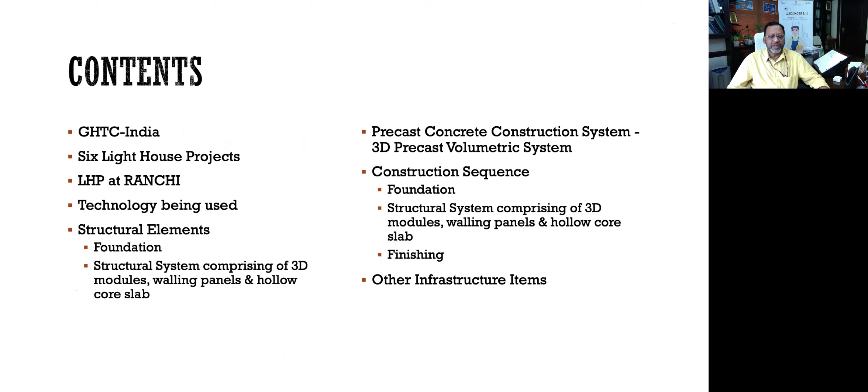Hello and welcome to the lecture on Lighthouse Project at Ranchi. My name is Shailesh Agrawal, Executive Director of BMTPC, and I'm going to educate you all through this presentation about the field level implementation of innovative construction system being used in Lighthouse Project, including design basis, material, manufacturing, few structural drawings. The outline of my presentation is as follows, starting from Global Housing Technology Challenge India and Lighthouse Project. The technology being used in the project will be discussed.

Ministry of Housing and Urban Affairs, Government of India organized Global Housing Technology Challenge India, in which one of the components was Construction Technology India Exposition, which was inaugurated by Honorable Prime Minister of India on 2nd of March 2019. Through this CTI 2019, Ministry of Housing and Urban Affairs could evaluate, assess and shortlist 54 proven demonstrable technologies which can help build maximum number of houses in minimum time and minimum cost.

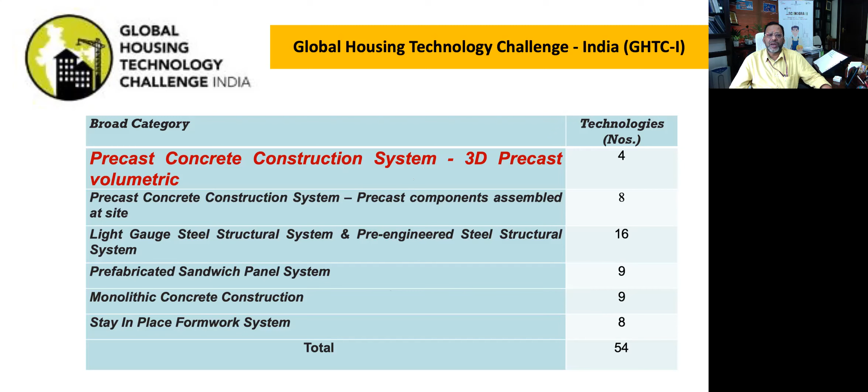These 54 new construction systems have been divided into these 6 broad categories, namely precast concrete construction system 3D volumetric, precast concrete construction system 2D planar, light gauge and steel structure system, prefabricated sandwich panel system, monolithic concrete construction, and stay-in-place formwork system. Today, we are going to discuss precast concrete construction system 3D volumetric, which is the construction system being used at Ranchi.

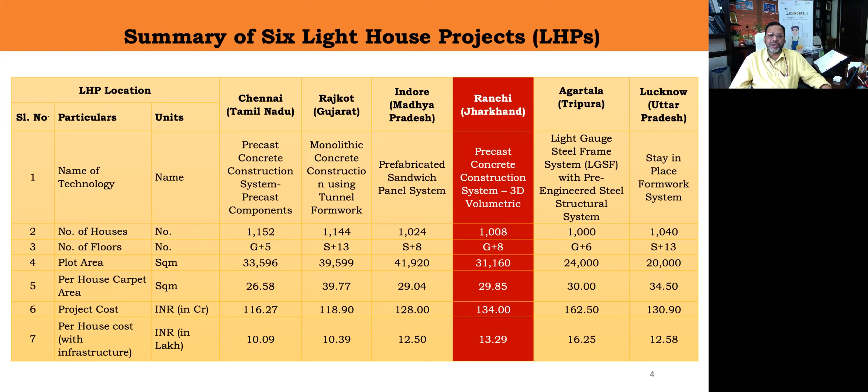Before getting into the technology, let me briefly tell you about the 6 lighthouse projects which are currently being implemented in different parts of the country. They are in Chennai, Rajkot, Indore, Ranchi, Agartala, and Lucknow. As you can see, the houses being constructed are more than 1,000 in all the places, and number of floors vary from 6 to 14. At Ranchi, the structure is 9-story.

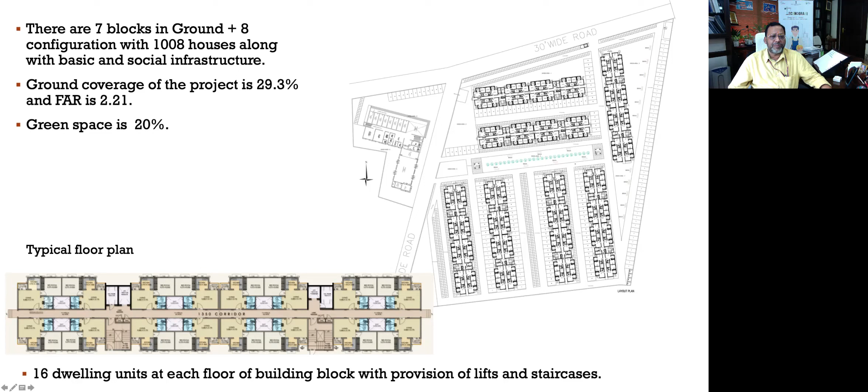Just have a look at the layout of the project at Ranchi. There are 7 blocks, as you can see in this drawing: 1, 2, 3, 4, 5, 6, 7, and all these blocks are in the configuration of ground story plus 8-story. So it's 9-story. There are green spaces up to 20%. And as you can see in this typical floor plan, there are 16 dwelling units in each floor, which are connected through a corridor of 1.3 meter wide.

Along with the NBC norms, the other features which have been included in the project are as follows: green rating as per GRIHA, use of renewable resources in terms of rainwater harvesting and solar lighting, solid waste management, sewage treatment plant with recycling of water, and firefighting system have also been included as per NBC 2016.

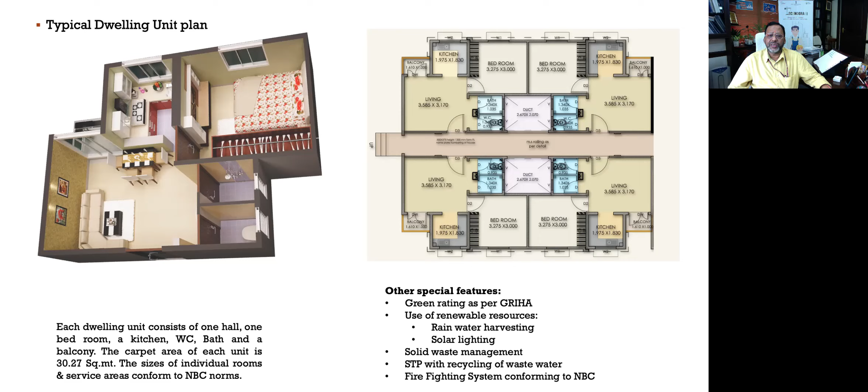The other system, which is much popular of late, is cast in situ RCC framed structure, where on a foundation an RCC frame comprising of cast in situ columns and cast in situ beams is cast, and then slab is cast in situ and infill is done with any masonry. So these two methods, as you all know, are time consuming.

They are not resource efficient, and over time, it has been found they are not even sustainable and not environment friendly. It is high time that we replace these systems by systems which can help build faster without sacrificing structural and functional performance. One such system which was evaluated, assessed, and shortlisted during Global Housing Technology Challenge India is precast concrete construction 3D volumetric.

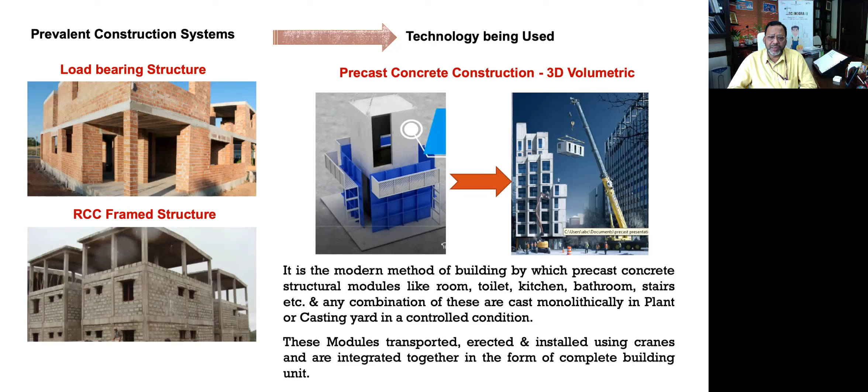Let me just explain the manufacturing, transportation, and installation. What typically is being done? First of all, you have the mold. Depending upon the project and depending upon the size of your dwelling units and the size of your rooms, it is first decided what kind of modules need to be made or cast, and depending upon that, you first design the modules.

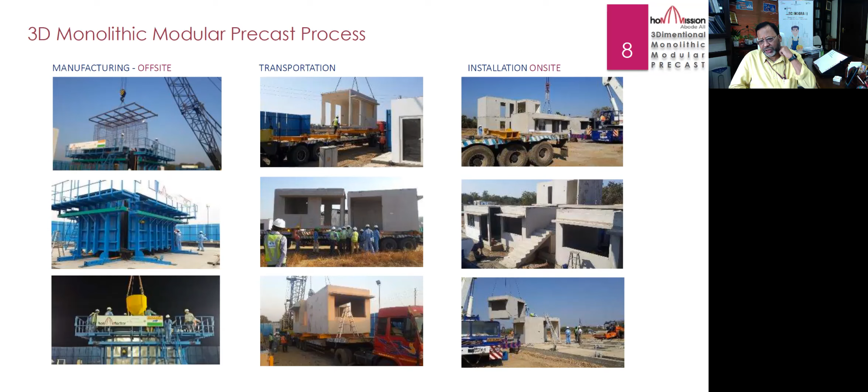Structural elements, if I talk about them: because the entire thing is made volumetric in 3D modules, the walling element, the floor, your roof, all are cast together. So the entire box is the structural element here. Basically, this 3D box acts as a structural system which helps in transferring the load of the structure to the foundation.

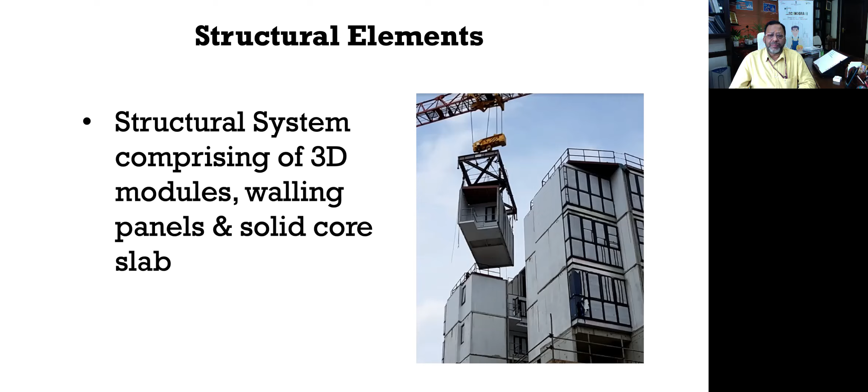As you can see, for manufacturing it, first you require the steel mold, which is again customized depending upon the project requirements. Sometimes these 3D modules are also known as pod elements. Then you have high strength steel, coming from the structural design, which is placed in these 3D molds. If you are doing a kitchen pod or a toilet pod, you need to fix pre-planned electrical and plumbing lines, and once you have fixed all services, you pour the concrete.

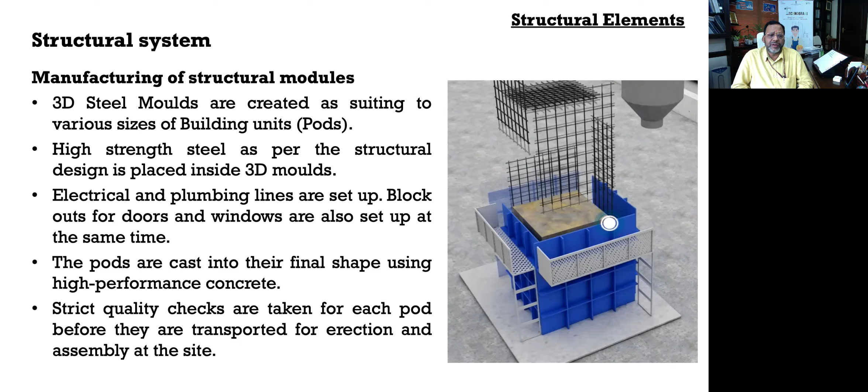There are strict quality checks taken before pouring the concrete, and then they are transported to the site under strict supervision and erected in the same fashion. Construction normally follows this sequence. First of all, you need to make the foundation, which will be as per the soil strata, the geotechnical investigations and bearing capacity.

Once you do the foundation, you bring those structural modules, which you can concurrently manufacture in the factory or in the casting yard. Once you get those structural modules or pod elements at the site, you can put them on the already laid foundation after aligning them and joining them together through dowel bars, already laid anchors and other things.

Okay, gable end walls are positioned to terminate the sides of the building. The ends of the room are known as gable walls. Sometimes you can make it without gable end walls; it depends on the project and your requirement. You can have an open-ended module, and later, to have monolithic action, you can put the entire end wall, which is again made in the casting yard. If these spans are high, then you can use pre-stressed slabs. It can be hollow core slab as well.

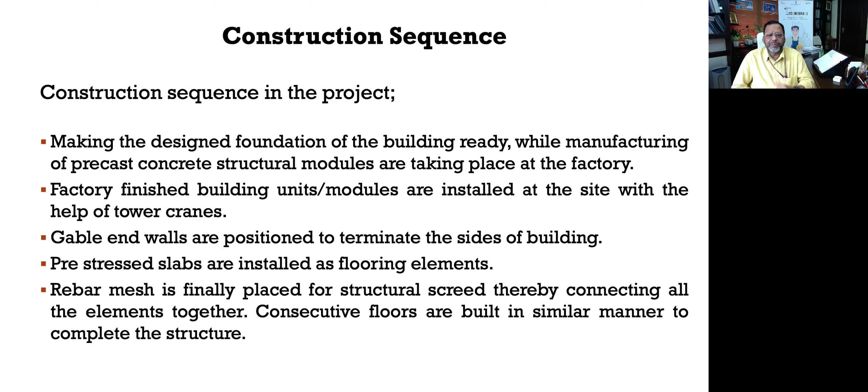Once you put the module over the foundation, in order to have another floor over this, screed is nothing but a concrete of less thickness. It is around 75 to 100 mm thick, with nominal reinforcement, which is a rebar mesh, put over the already laid module so as to connect it with the floors which will come over that structure.

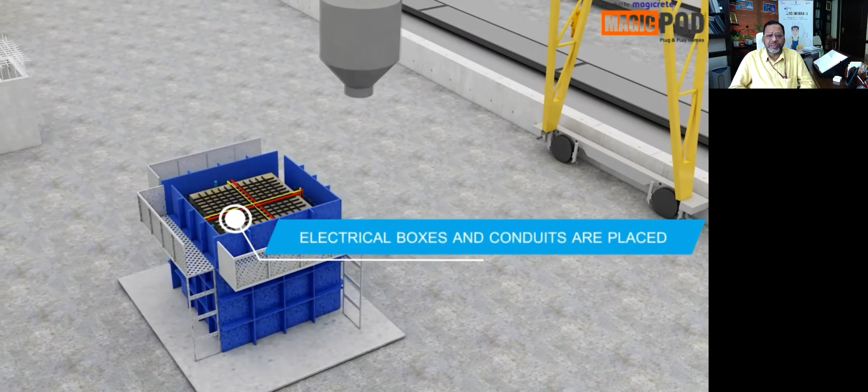Let me just briefly show you the entire sequence through a video. So mesh is being put on the mold, and then you can see electrical boxes and conduits are being put, and now already made concrete is being poured here. This is self-compacting concrete, so you don't require any compaction.

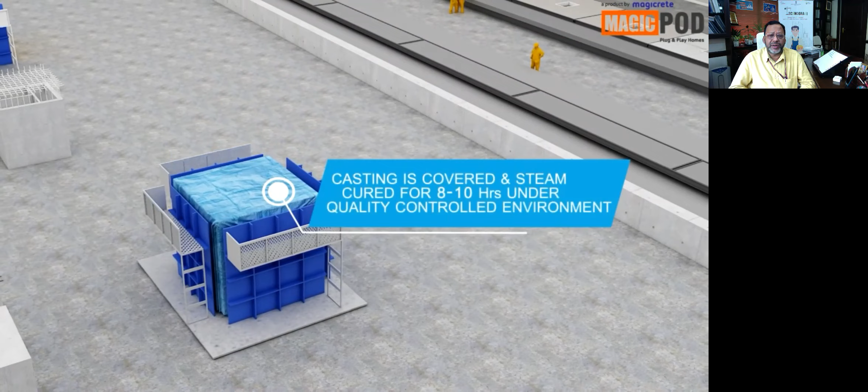And after some time, you demold it. Demold means remove the mould, then casting is covered, and then it is steam cured for 8 to 10 hours. Once it is cured and gained strength, then through a gantry girder and crane, you lift the module. And right now that lifting of module is taking place.

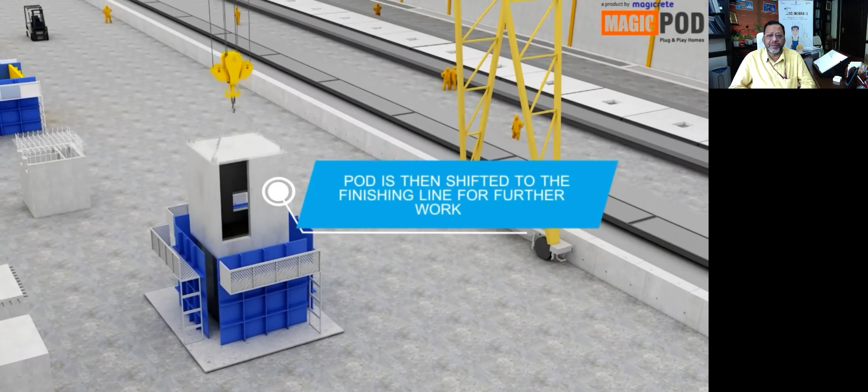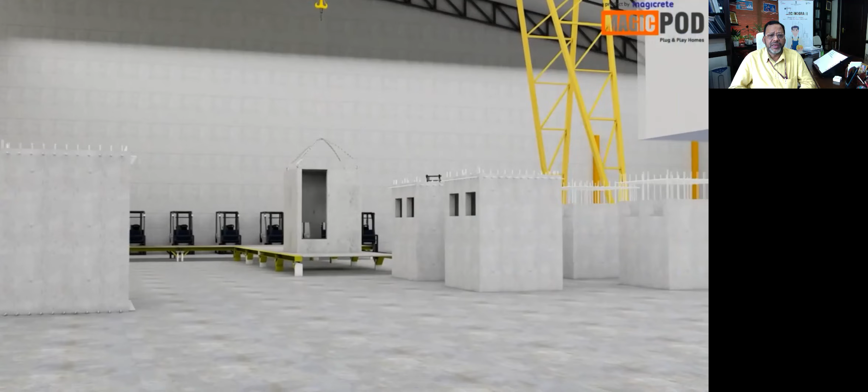So once it is lifted, then it is taken to other part of the casting yard, where, as per your requirement, you can put the finishing items in this. Suppose you are making a bath or a toilet pod, so you can put the seats. If you are doing the plumbing, you can do the plumbing. Here this waterproofing and tile application is shown.

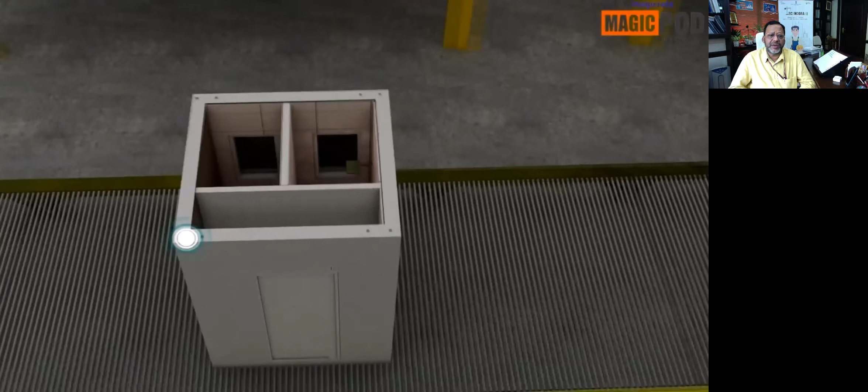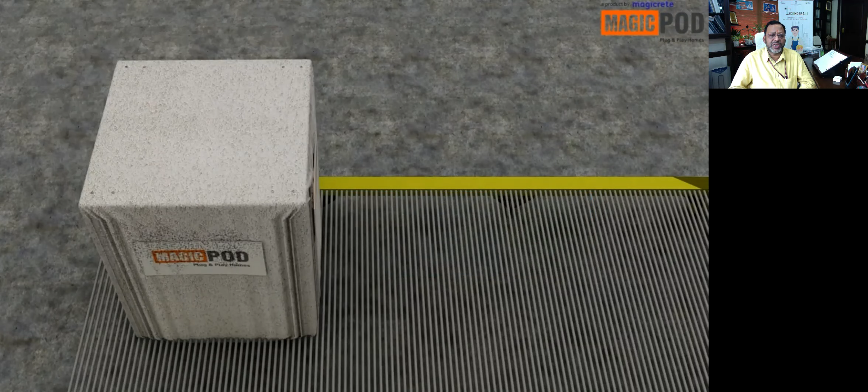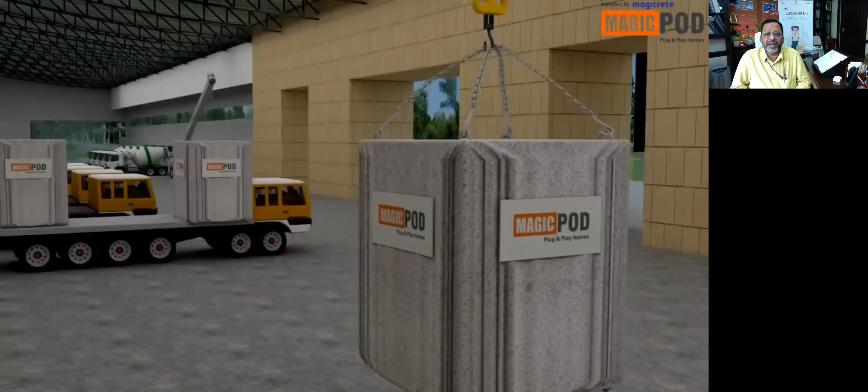Then you can put the ventilators, doors, windows, then the WC wash basin, and now this pod is ready. And after final finishing, this pod can be loaded on the truck and can be transported to the site. So this is how it is being laid, and we need to design these anchor bolts also for lifting it and putting it on the trailer and then transporting it to the site. So these anchor bolts are also designed.

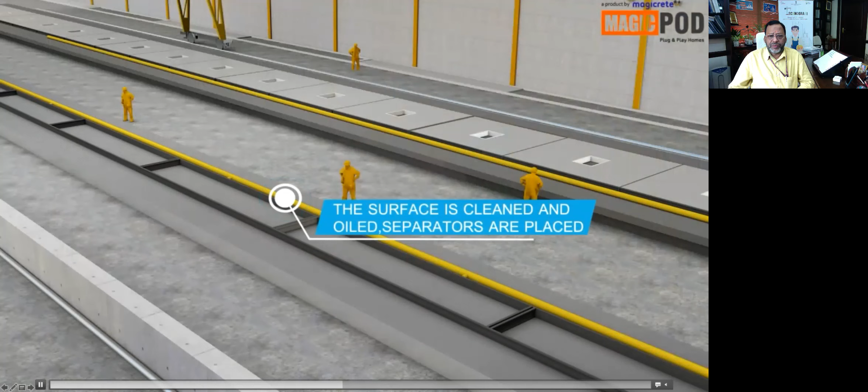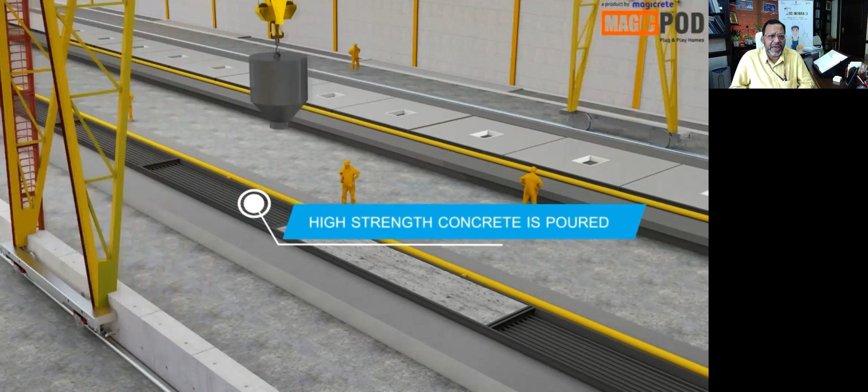As you can see here, the surface is again cleaned, and high strength concrete is poured if you want to make the slabs or walls. So this is how the walls, again, depending upon your project, you may have the entire 3D modules, or you have open-ended module, and then slabs are cast separately. The casting of slab is being shown to you, and again, this is being steam cured for early strength, and then these slabs are being demolded and transported to the construction site.

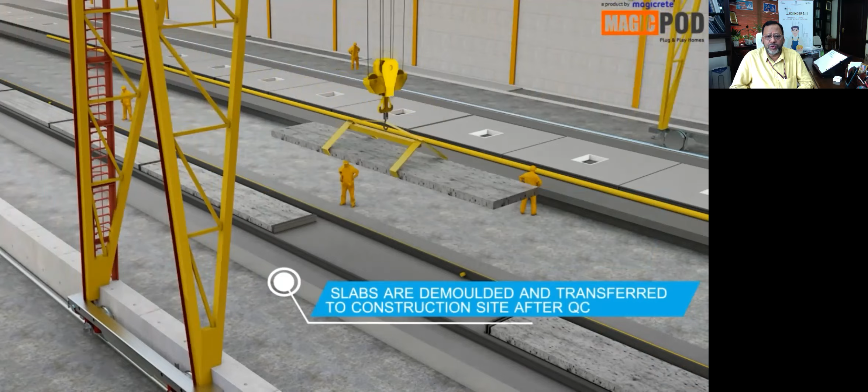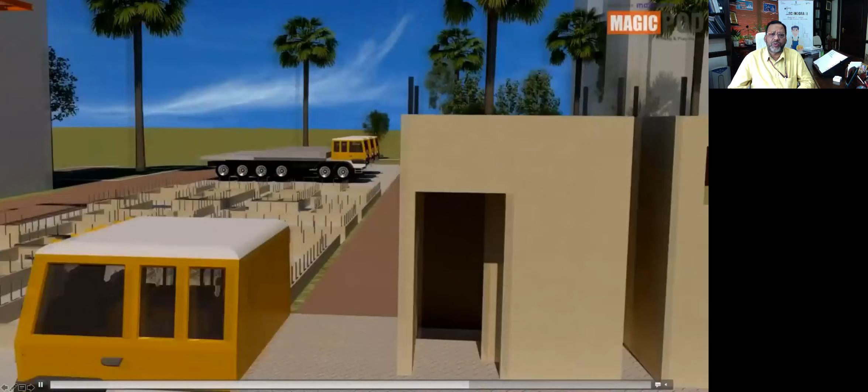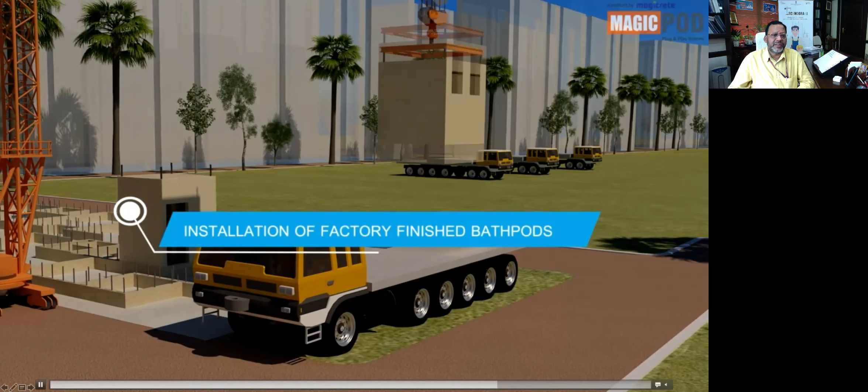So suppose you have to make the roof, then you can just put it over the already laid module. And these are those dowel bars which I was talking about. So through these dowels, the two floors are being connected. Now you can see here, this is the foundation, and this is the plinth beam where you have a dowel bar. Then over that you are putting a bath and WC, and then you are putting other modules.

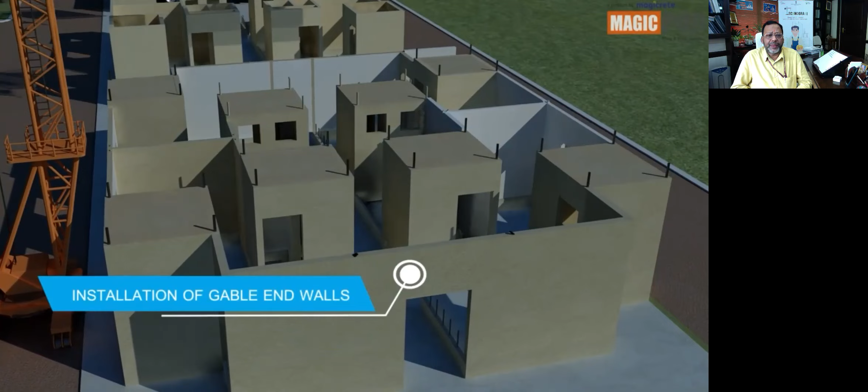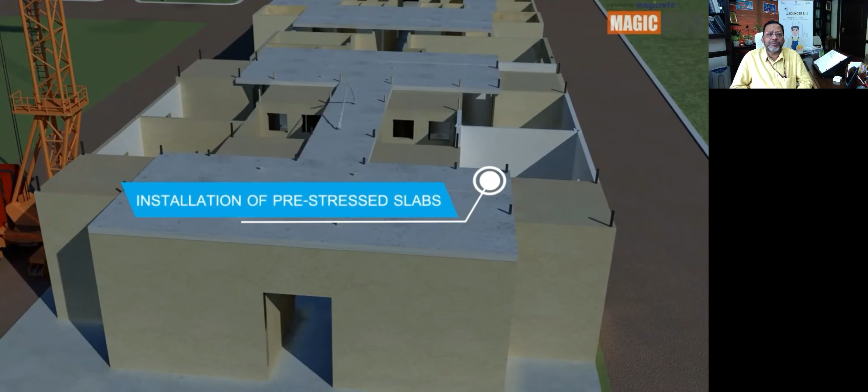Then these gable end walls are the external walls which are being put to connect all the modules together. Over that, these slabs are being put. You can see, and after putting that precast slab, you will put the reinforcement mesh so that everything is connected together, and then concrete screeding will be done.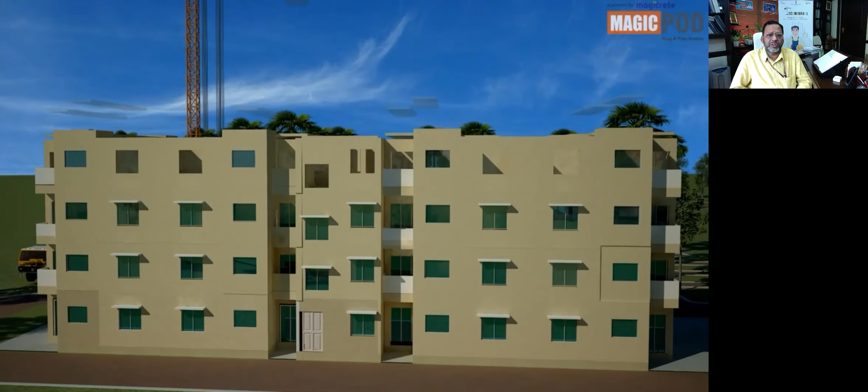After concrete screeding, you can put another floor, and that is how the whole thing can be repeated for the next floor. So that's how block by block, it is like a Lego block. You make these blocks in factory and then put one block over the other, carefully joining them together through these dowel bars which are already inserted. So this is the finished building.

Now, there are a lot of concerns being raised about the reinforcement being used here, because these are thin sections, and how modules are being connected side to side, and one over other. So this is a typical structural detail of a typical module. It has 4 walls, so you need to provide vertical and horizontal reinforcement. If it is less than 100 mm, then you can have 1 layer of reinforcement. If it is more than 100, then you can have 2 layers of reinforcement.

So this is a typical module of size 3.5 meter by 6.8 meter, and these are the reinforcement requirements. And to have better seismic resistance, you need to have continuity of reinforcement at the corners, whether it is an L joint or a T joint. The reinforcement is to be continued from one corner to other, by placing additional bars and stirrups.

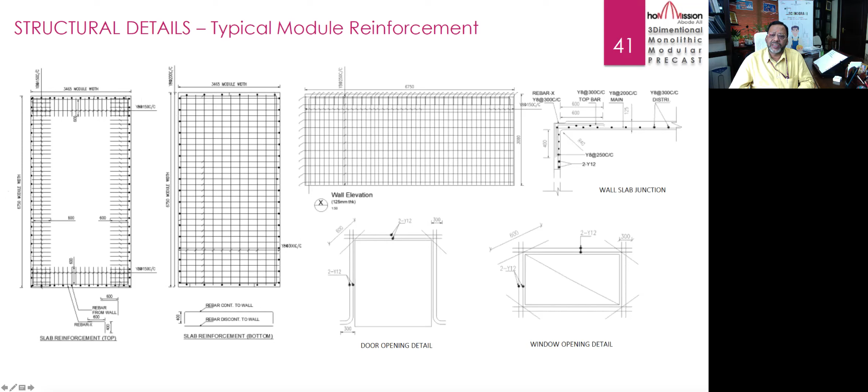So this is how the detailing is done, and there you have to put the reinforcement on both the sides, and this is the typical reinforcement which is shown here. So this is a typical module reinforcement, and now connection and joints. As you can see here, there are several connections when you join different modules together.

So what you see here, these are the external vertical connections, these are the internal vertical connections, and these are the horizontal connection. Horizontal connection means we have to connect this module with this module, and how these modules are being connected, that I'll try to show you. Then internally, these are the vertical connections when you are putting one module over the other, how they are being connected, and these are the external connections.

So if you look at the external vertical connections, normally what is being done, you put a double bar. So this module and the other module which is coming over this, these two are connected through a plate. This plate is already fixed in the module, and then a double bar from this and a double bar from the modules, they both are welded with this plate. So you can see here, this is a steel plate which is already cast with the module at the time of casting, and then this base plate is welded through these double bars.

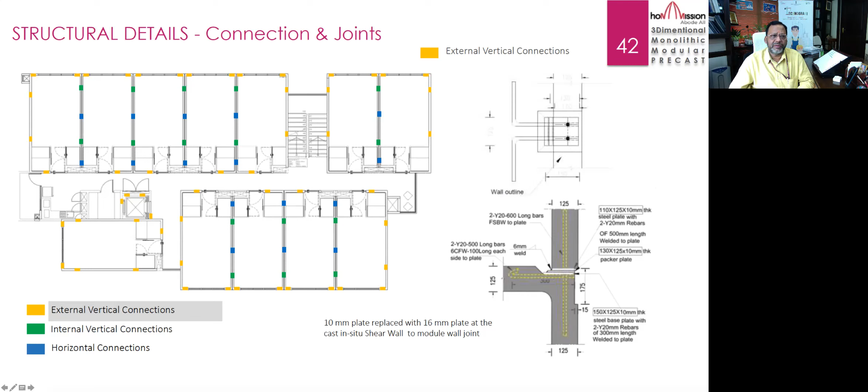These are the long bars which are 20 dia bars, and these bars are welded with this, and to have it integrated with the slab, you have a double bar which is extending from the slab, and that is also welded with these two bars. So this way you will get the integral monolithic action at the joint. These are two modules, and this is the slab which is being cast. So you have double bars in all the three, and they all are welded with this plate, which is shown here.

Now let me also show you the internal wall connections. So you have these internal walls. How they are connected: you put up the base plate, and over the base plate some packing material may also be put, and then there are holes which are created during the casting. It is called a sleeve, in which you insert reinforcement, 16 mm or 20 mm depending upon the size, and these bars are welded with these plates.

So this is one module, this is another module, and these are the modules. So there can be a four-way connection, or it can be a two-way connection, depending upon the connection you have. And if you look at the plan, this is how it looks. This is one plate, this is another plate, and this is how these bars are being welded with these plates, so as to have a monolithic connection.

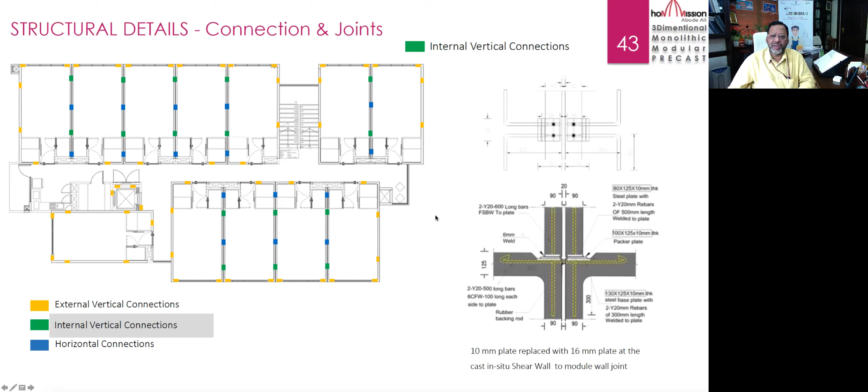Now let me also show you the horizontal connection. If you have to connect them side by side, this is how it is being connected. So here what you do, you put a steel angle. This is a precast modular slab, this is again a precast slab, and this is your module which is coming. So you are putting the angle, and through this angle you are welding this bar which is shown here, and then the opening which is created is filled with non-shrink cementitious grout.

So if you see the section, what you have here is the angle, and then through this double bar, this is welded on both the sides to give you a monolithic connection.

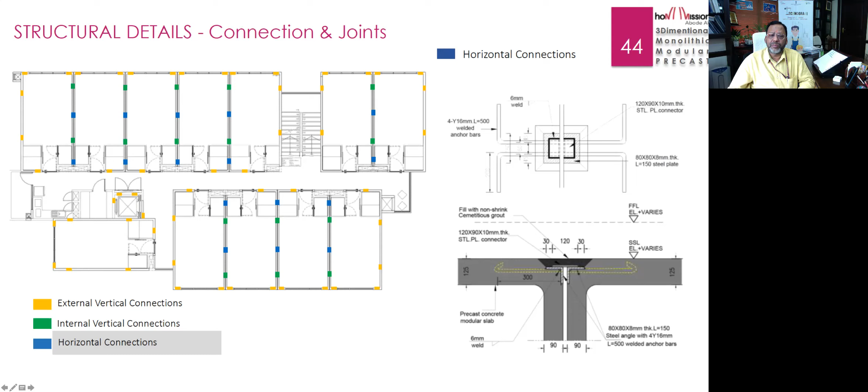Now, suppose in this project we are having a corridor as well. A corridor is normally cast in situ, and the idea of casting it in situ is so that all these modules can be connected monolithically with this corridor. So normally it's a good practice to have a corridor in between, and through this corridor you can ensure connection of all the modules together. And how it is being cast, you can see here. You are putting a reinforcement bar, and there is a rebate here, and with this rebate, this is welded, and then the bar is put inside.

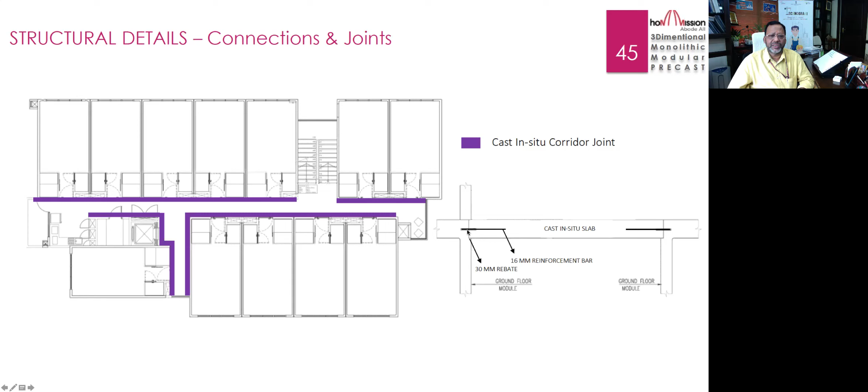Now there is another connection, how to connect the module with the staircase landing. So this is a precast module, and this is the landing of your staircase. This is how it is being connected. As you can see, you have to use non-shrink cementitious grout to cover the bolt. So what you do is you put an anchor. There is a bolt sleeve here.

The bolt sleeve is created at the time of casting, and that sleeve is slightly more than the diameter of your bolt, and then you put the bolt, and that bolt is then grouted with non-shrink grout, and then it is connected through nut and bolt with the landing of your staircase. So this is another connection. If it is a mid landing, then how do you connect it? And there are two modules. So this is how it is being connected here.

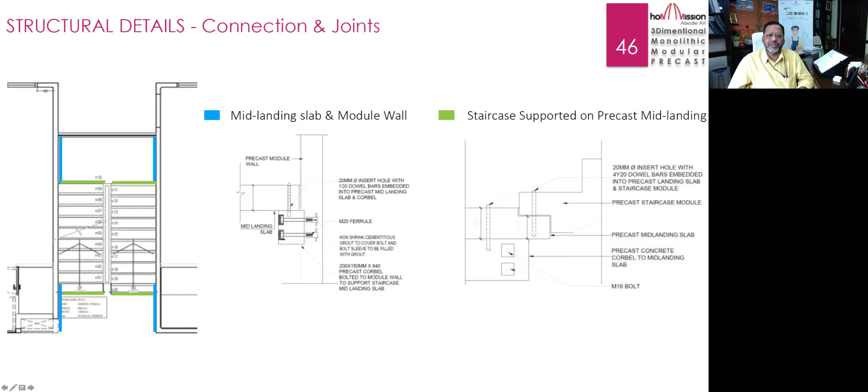There are several advantages of this system. Let me also tell you, this is the first time that this technology is being used in India at such a large scale. And as you can see, the entire construction activities, including finishing, are being done in the factory under controlled conditions.

90% of building work, including finishing, is done in the factory. So there will be significant reduction in construction and occupancy time, and significant reduction in material wastage. Almost there is no wastage of material, and at the site you get a clean environment. Once you do entire operations in the factory, you bring resource optimization, and you have improved much better quality, precision, and finish.

Also, when we use concrete under controlled conditions in this project, they are using GGBFS, which is ground granulated blast furnace slag, or other waste material which is a byproduct. Fly ash is a byproduct of thermal power plants, and GGBS is a byproduct of steel plants. So any waste material can be added as a pozzolanic material, replacing part of the cement. Up to 30% cement can be replaced by these waste materials, resulting in conservation of natural resources, and you also get improved workability and durability.

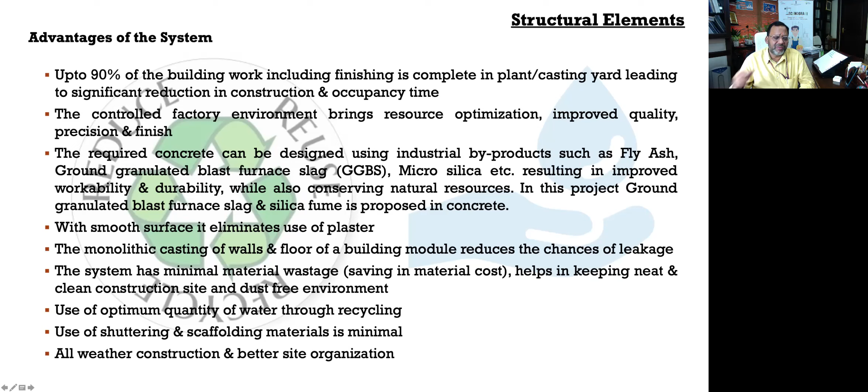All you require is a steel mold, and that steel is recyclable. These molds can have repetitions up to 100, 200, or more than 200 times. So the use of shuttering and scaffolding is minimal. All you require is heavy machinery for lifting and transporting. These houses can be made in any weather conditions, and you can organize it better at the site.

The essential requirements you need: right now this is a new technology, so we don't have production facilities in different parts of India. So wherever you have a project, you have to create a casting yard, giving additional space to the agency so the casting of different modules can be done. If the factory is located far away, you have to transport in long trailers, which may not be economical. So setting up a casting yard at the site is a must, and that is a requirement. Secondly, you require lead time, because you first have to set up a casting yard, and then you can start construction work.

Also, since these modules are made in big sizes, you need an approach road to the site for movement of trailers and cranes. This is a specialized technology executed by specialized people, and when you put modules side by side or one over the other, you have to connect them properly. You have to weld the bars with the base plates, so you require a skilled workforce, and it has to be done under strict supervision.

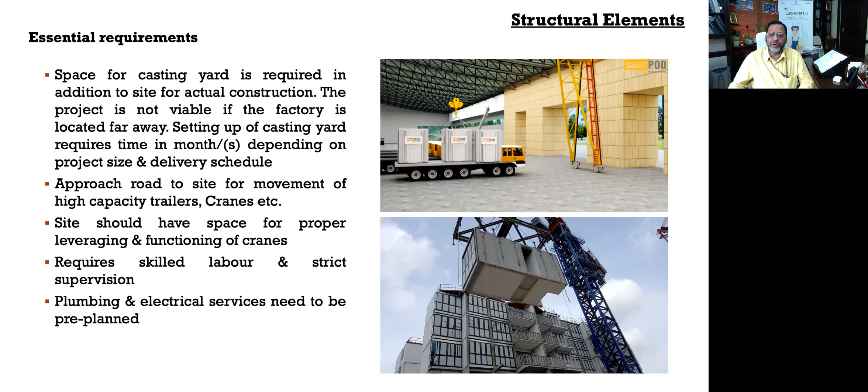As in any other technology, here also you have to pre-plan plumbing and electrical services, and once that is done, it is difficult to alter the plumbing and electrical services at a later stage after occupancy.

That was all about this project, because unfortunately this project just started a few days back. Right now geotechnical investigation is being done. After that there will be laying of foundation, and in the meantime the casting yard is also being set up. Once we have modules cast in the factory, we will share those photographs with you, and we will also show you the actual site photographs and try to explain the construction sequence in detail.